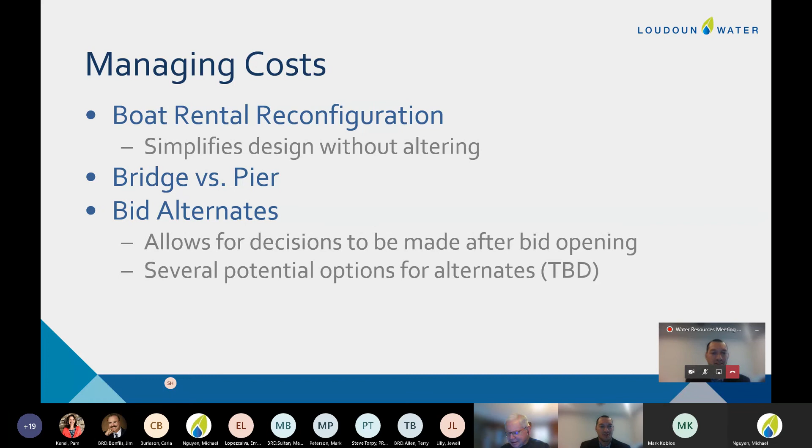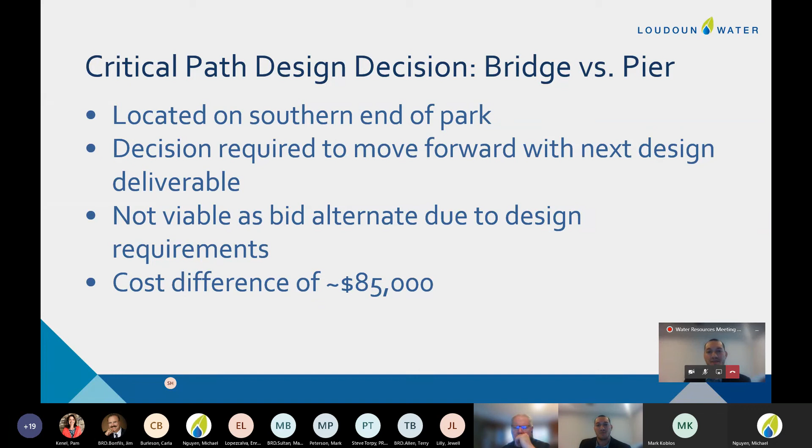So this is one of the critical path design decisions that we need to provide feedback to Nelson Byrd Woltz on. It's located on the southern end of the park, on the main arc. I have a map on the next slide to point out where it is. As mentioned, it's required to move forward with the design. This isn't viable as a bid alternate due to design requirements, so we'd have to make two different designs and have contractors bid on two different options. Lastly, a high level rough order of magnitude cost is about $85,000 difference between the two options.

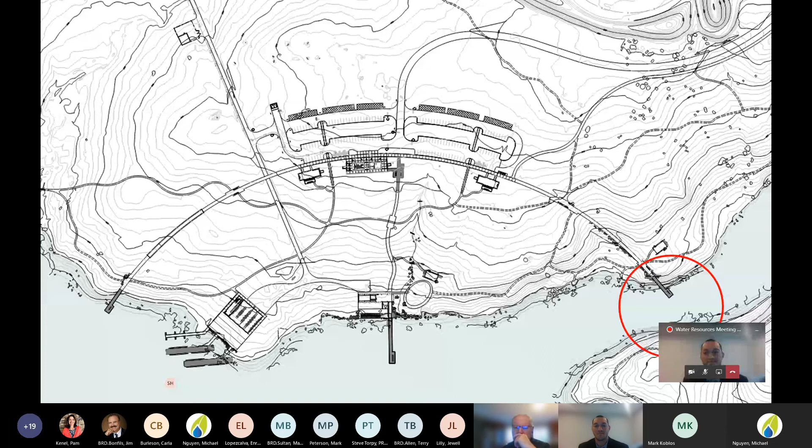So the bridge is more expensive than the pier. To give everyone a clear idea of where this is, it's at the bottom right of your screen, the big red circle, the southern end of that main arc we'll talk about later today. Right now this version is showing the pier option. On the next slide I have the bridge - it's about a 200-some foot bridge that will connect two ends of a little finger of Beaver Dam Reservoir. You can see on the map there's a trail that runs along the edge where it will connect, and we also have a trail system on top that runs around.

If we don't build this bridge, we're still able to access that far side of the finger. It's about 1,500 to 2,000 feet, from some preliminary measurements, so it's not inaccessible without the bridge, but it would make for much easier walking if there is a bridge.

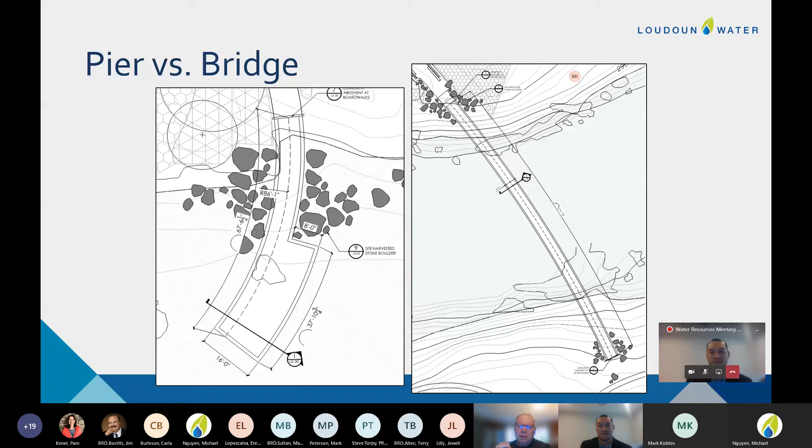Whereas with a bridge, you'll have the option to view pretty much down the full length of the reservoir, which is about 1.5 miles - it'd make for some great views throughout the length of the bridge. But again, it comes at a cost - we're looking at $80,000 to $90,000 or so to extend all the way to that far tip.

So I think the goal today is to get some feedback from the committee on what route you'd like us to pursue. If you have any questions or items to discuss, I think now would be a good time to talk about them.

And if I could just add to what you just said, I think we feel confident that bridge versus pier, the pier really doesn't take away from the educational aspect of what we want to do there. It really is about the views. So with that, I'll open it up to your questions.

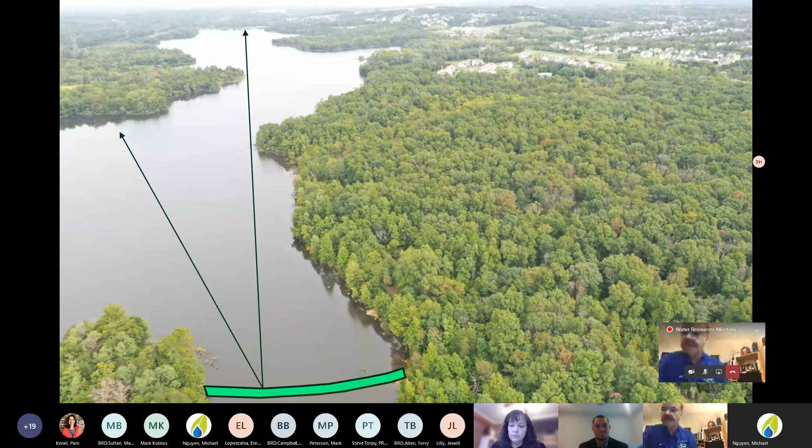I have to agree with the previous two board members. Having the bridge has a lot of value. It will be part of the trail system that is accessible, and having a sister who is wheelchair bound, I think it would be important to be able to get there as well as to get to the other pier.

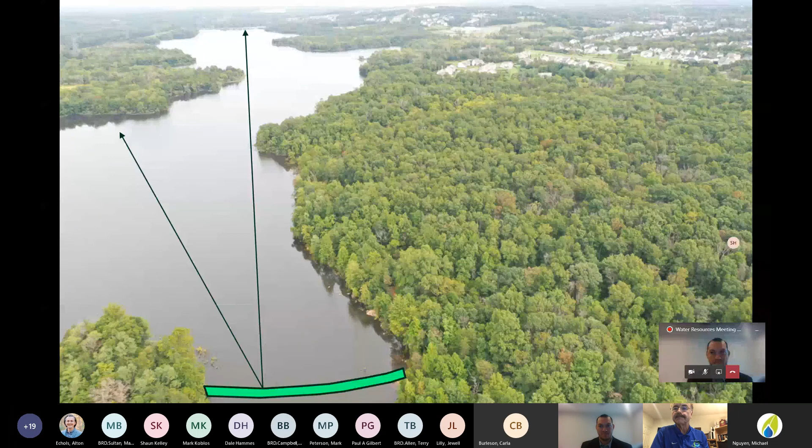Promise. Thank you, Marty. Oh, I meant to have my hand down, but I do support the bridge. Thank you, good, I think that clears all the questions. Oh, I'm sorry, okay, Marty lowered his hand. All right, so let's continue the presentation, if I can get the slides to go.

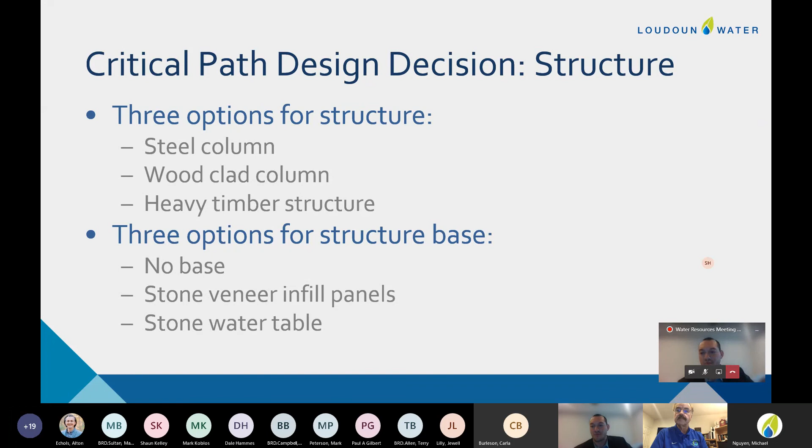So moving on, another item that we need feedback on is relating to the building structure. We have some rough images to show, but we're mainly looking at the supports of the butterfly roofs. Today I'll be presenting 3 options for that: a steel column, a wood clad column, and a heavy timber structure, and I'll go into the specifics for each of those. Once one of those options is selected, we also have some options for the structure base. I think the best thing is I'll just move forward through these, and we can discuss when I go through some of the options.

Please stay on, Mr. Allen. Oh, yes. You guys are gonna hate me, but in the renderings you sent, A, B, and C, I have a much more lengthy list of options, which includes D, E, and then at the end of E there's 1 through 7. Is there any reason why those other options were not included, other than just A, B, and C? Because personally, I like all the other options that weren't included better. And I know it's a subjective thing, but I'm just wondering why the whole list wasn't sent out.

Just to clarify, were those the renderings from when we were talking about the traditional elements? Are those the other renderings, Mr. Allen? No, D, E, and then the subsequent group after those are all butterfly roof renderings, but they were just different variations of what we were talking about along the way. In other words, the E versions have the lally columns wrapped in stone veneer, and the 1 through 7 versions have the columns wrapped in wood. Some of them go all the way up to the bottom of the butterfly roof, so you can't see any metal at all. They're all wood clad.

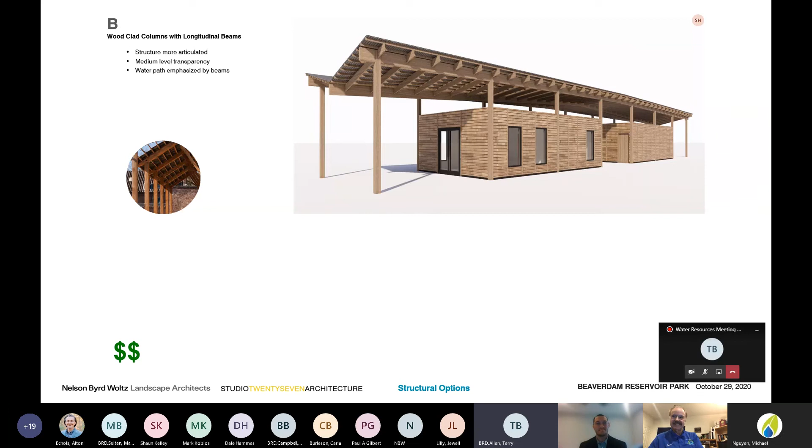I'm not a fan of the steel columns. They look like the ones I have in my basement. They just seem undersized, so I don't like that look. And I don't like the crisscross pattern, it looks too busy to me, so I vote for B as a straw poll.

I think Marty had his hand up also. If we're looking for votes, I'd have to agree with Terry, I would vote for B for similar reasons. Brent, I don't have a strong preference, so I'm happy with B, but if you have other comments I'd be happy to hear them. Yeah, I'm happy with B also. Great, okay.

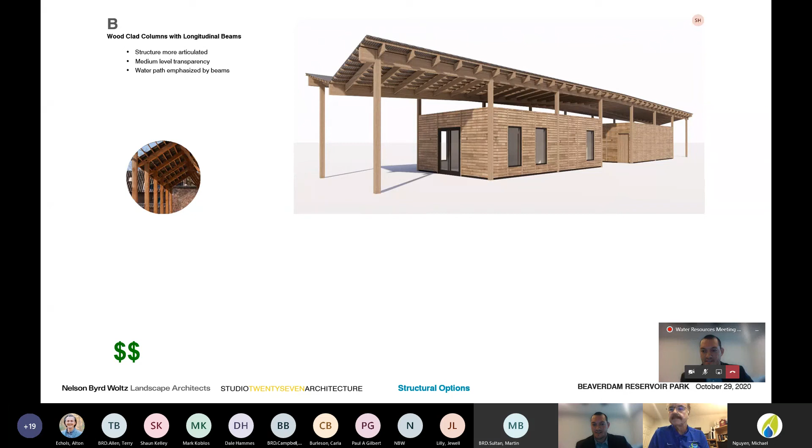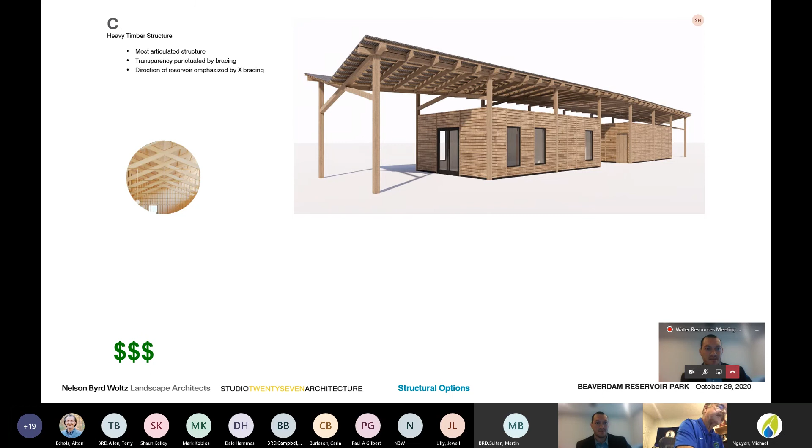Okay, so it sounds like, unless someone else has any comments, we can go ahead and move forward under the assumption that we're moving with the wood-clad columns. And with that, the next decision is to understand the footing for the base for these wood-clad columns.

Essentially, once again, we have three options: no base, a base with stone veneer infill panels, and then more of a stone water table base. And again, this decision is purely for the bases. We'll have some other decisions we can move forward with in a couple weeks for the committee. It might be a little tough to see here, but the three options are shown on the right.

If you have questions on them, we have Evan here to answer, and we also have Studio 27 on the call, who is the architect, to answer any questions as well. So you're looking for input from us on that? So I can go ahead and start.

I prefer the stone base, and was wondering if we could collect stones on the property and use those, but that's just me. Anyone else? This is Marty, I would agree with you, I like the stone base as shown. I agree, I'm sure we're picking the more expensive options each time, but I like the base too, the B.3.

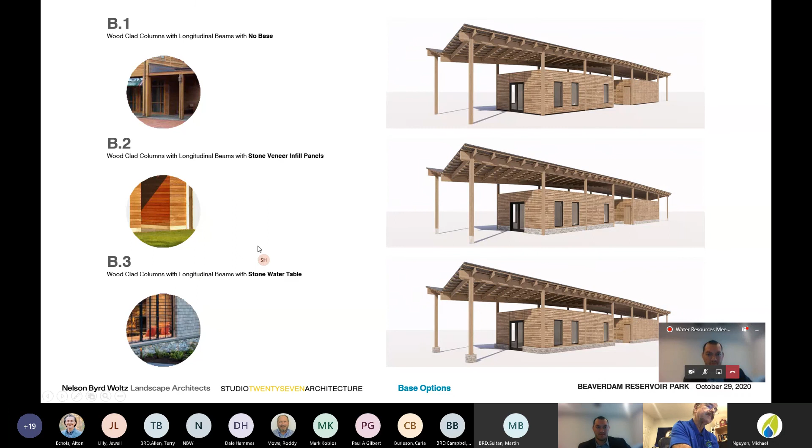The last thing I have to talk about today before I hand it over to Steve is just a quick overview of the trails within Reservoir Park, and then Steve will cover the trails from a broader aspect from a county perspective. The trails in the park are essentially three levels. I'll go over each in the following slides. The goal was to have different trails for different experiences, allowing access to some major structures while not impeding on the more natural scenery closer to the water.

Looking at the three levels of trails, first is the primary trail. These are the big main trails of the park, about 10-foot width, and they'll be ADA accessible. Flat, paved, or concrete asphalt pavers, depending on where in the park you are. This includes the bike-ped trail coming into the park, and especially the main arc, which is the big one. It allows people to span pretty much north to south throughout the park. So that's the big primary trail.

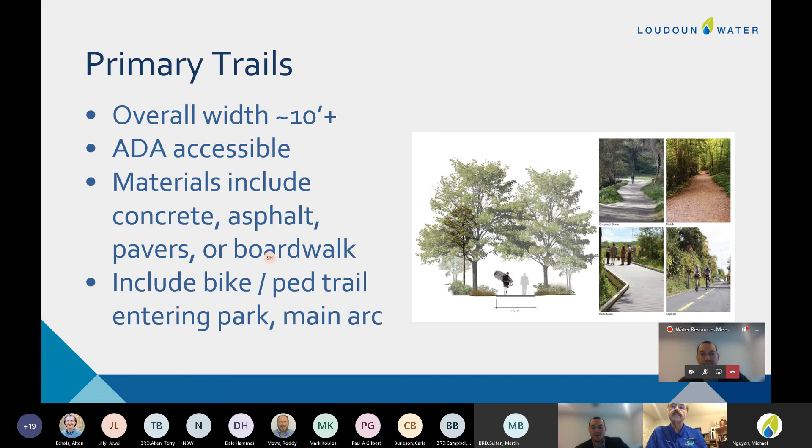Now off of that, we also have our secondary trails, which are a little smaller but still accessible for the most part to everyone. They're maybe 4 to 8 foot width in general. These will include materials like boardwalk, pavers, asphalt, and some mulch, but overall they're pretty accessible. These will be a lot of paths to structures, shelters, things of that nature—like the main path to the boat rental, trails near shelters, etc.

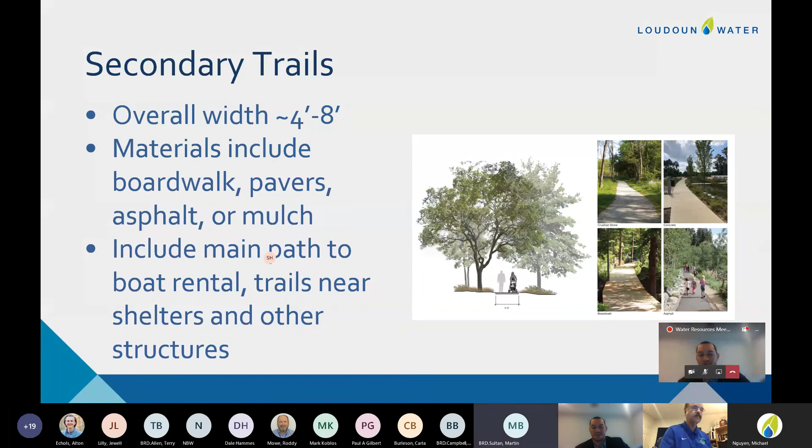Lastly we have the tertiary trails, and these are your natural trails. The goal is to get people away from the hustle and bustle and give them that experience a lot of people are looking for with this park—just being away from everything. They'll be 3 to 4 foot wide. If they're new, we'll look to mulch them; if existing, leave as natural surface. I think the goal is, if we need improvements, we can work with Nova Parks to do that. But as of now the plan is for existing trails to pretty much stay as is, and new trails will get about a 4 foot width mulch bed.

Just to give an overview of the trails in the park and how they lay out, I tried highlighting each of them. As you can see, red is the primary, with the main feature being that overarching main arc. Green is secondary, and then the large majority of trails are the natural surface or mulch trails weaving throughout the park. Were there any questions or discussions on trails and what we intended for each?

I'll just make a comment here, turning on my video. I think it's important, and I like what you've done here, Stefan, where we've identified and are designing different trails, different paths, different materials—I think that's important and I like that feature. Sometimes these discussions can be about picking between the merits of a natural surface trail and a hard surface trail, or different widths, and from my perspective there's value in all of it. Depending on who the user is and what experience they're looking to get out of the park, all of these types have value. I think it's good that we have a variety of different types of paths and trails there. So kudos on that, and kudos to our design team for doing that. I'd still like to see more, but we can discuss that later. I do like the fact that we have these varying degrees of paths and trails. So thank you.

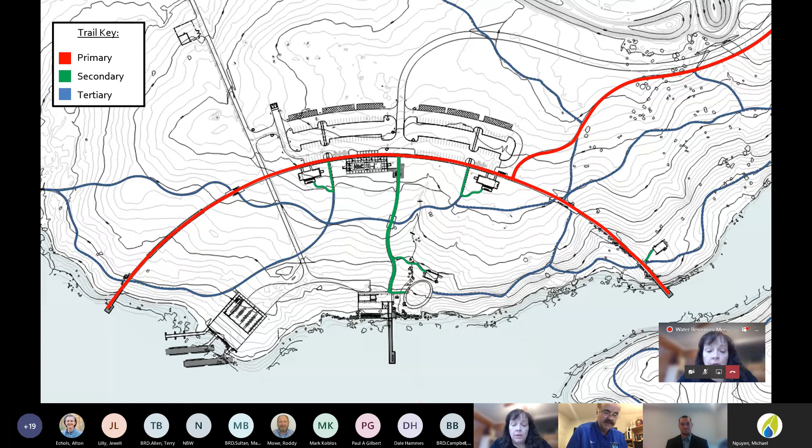Okay, and we can actually include something like that in the motion to the full board. I'm hearing acceptance of moving forward with a motion to the full board. I'm not sure in my head yet what that motion says, but we could certainly pass it through you, Mr. Bonfils, and of course our chair, to make sure it covers what it is that you want the full board to vote on.

That'd be great. I have a short brief of it that I've been working on with the numbers, and I'll review those with Dale, and let's put that together as part of the report from this meeting, and of course our visit to the park this last week. So I think that's pretty good. I think that's a good plan.

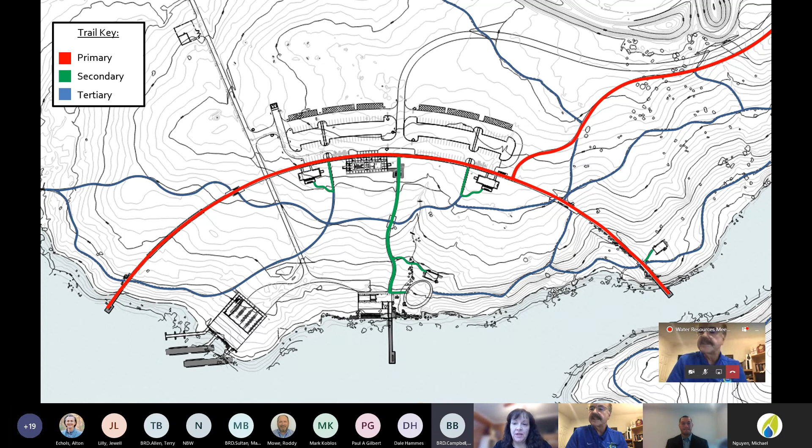Thank you. Hey, Jim, can I ask a question or make a statement here real quick? Sure. I've got...

The cost estimates here, and as I've been looking at it, the vast majority of cost associated with this is attributable to the structures. Just to put that in context, the natural surface trail that we discussed earlier, 3 inches of mulch on existing grade, that's $12,000 some there. So from my perspective, the trails and the pads and all of those sort of biking and pedestrian facilities, in my mind, I think that's priority.

From my perspective, I think that's what the public is most interested in when they come to this park. So from a cost standpoint, I'm not willing to cut on that side. Just speaking for myself, I'm not willing to cut paths, trails, bridges and things of that nature. I'd like to, if anything, expand that. And if we're pushed to save money, I'd rather look towards the structures. But I also recognize the rest of the board might not feel that way, and that's okay.

Speaking for myself, if we are pushed to the question of the structures plus more money for various treatments of those structures, versus the paths and trails, I'd rather have both than to cut on the trails. I'm not willing to cut on the trails, but if the board wants to look at cutting from the structures, I'm okay with that.

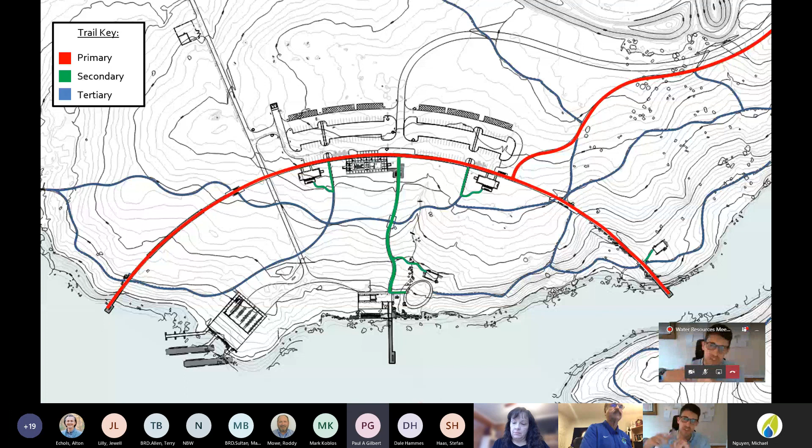The only other caveat I'd add, I don't know if Paul's on here, but I also recognize Nova Parks may have a different understanding of the impact the structures have on Nova Parks' ability to charge fees and bring in revenue from this. Maybe you could touch on that, Paul, because I understand that might be a different aspect of this.

Thank you. I think Jim has already alluded to it, that there aren't a lot of money-making opportunities here to recover the operating costs. Some of the few ones are the shelters, the boathouse will be something, and the boat rentals. There's an extraordinarily high likelihood that the operations will be a net loss, but you're trying to keep that net loss to a manageable level.

I don't know that we've put a fine, sharp pencil to exactly what it will be, just because we're kind of waiting for these decisions about the structures to happen. The maintenance building is also important. We want this park to be maintained well, and we need kind of a back area to work on things. I don't know if that answers your question, but all these buildings do impact the finances of it. There might be ways to cut down the cost of the buildings, but their function is important.

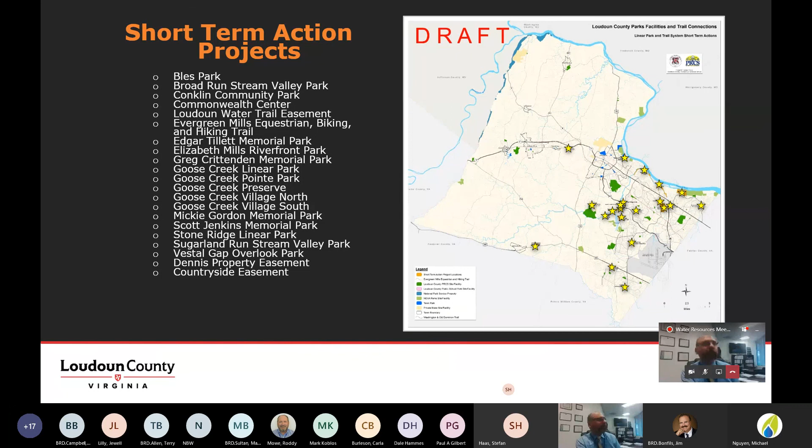That plan also directly links us to the Kincora property coming to us, about 150 acres, and the Commonwealth Center, which you see on the fourth bullet there, providing another large piece of property right in the heart of Ashburn, which will all be used as passive recreation and trails. Next slide, please.

So as I mentioned, the Broad Run Stream Valley Linear Park—and there you go—Goose Creek Stream Valley Linear Park, the W&OD Trail essentially, and the Potomac Heritage. You'll see those on the map in front of you. One of the things that's part of the Linear Parks and Trails initiative the consultant is working on is the implementation of what we're calling the Signature Project.

The Signature Project, if you were to start at the confluence of the Broad Run and the Potomac River, essentially there at Bles Park, come all the way down, go south along the Broad Run, hit the W&OD Trail—which I can tell you we are so fortunate in this county to have as part of our trail system, provided for everybody, because it's unlike anything else and really helps with the connectivity of these communities.

This Signature Project that we'll be working on right out of the gate makes available that loop that goes down the Broad Run, back west on the W&OD, north along the Goose Creek, and then ties into the Potomac Heritage National Scenic Trail. So you have that kind of rectangle right in the heart of the county, very close to the population base, getting that open as another one of those projects that will show movement with this overall initiative.

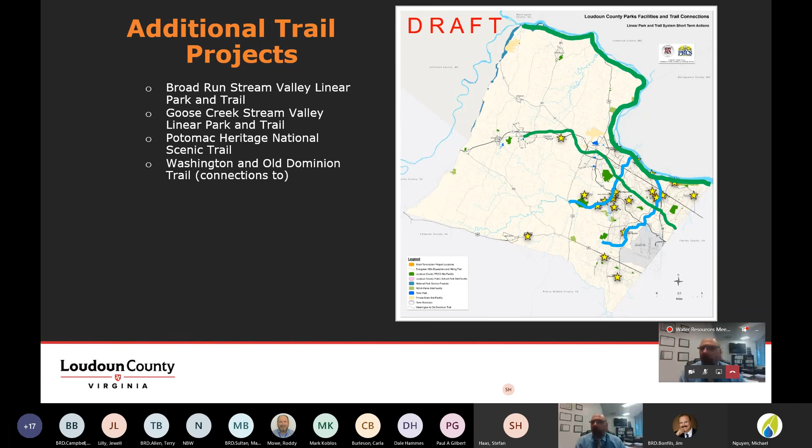The initiative is really trying to connect the community. We're talking about this from an economic standpoint, connecting the towns, but really being able to provide an opportunity for folks to get around the county in multiple ways—whether it be biking, equestrian, or hiking—really having that connection. It's something that is going to take an enormous amount of partnerships.

We have been talking with the various folks in the towns. Obviously, Nova Parks is a great partner and has been at the table with some of these discussions with us. The other major player is the Homeowners Association, because in Loudoun County, the homeowners have control of an enormous amount of their own trail system. We're not trying to reinvent the wheel in those communities, but we do want to have that connection with the Homeowners Association.

So what's been going on or done to date? Well, I mentioned earlier we created that Linear Parks and Trails Subcommittee. They created the scope of work and put that out after going to the Board of Supervisors for an RFP, which we've already gone through, and we have hired Design Workshop out of Raleigh, North Carolina, with a lot of background in developing these overall plans.

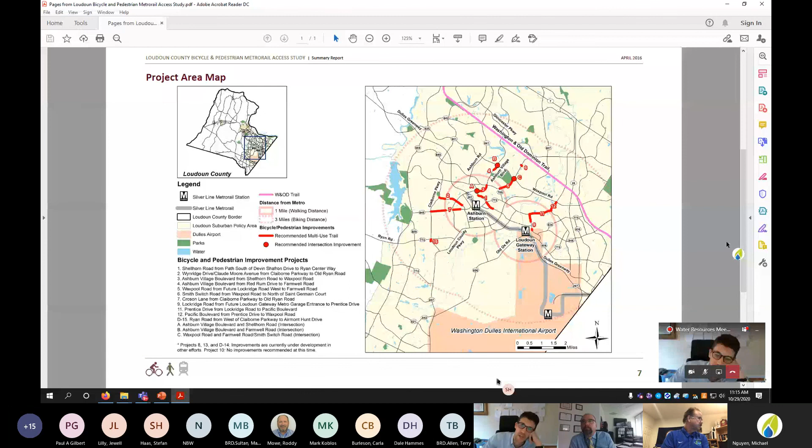So I think that's something that needs to be in our minds as we're planning this out. When I was looking at the design drawings, we've got 9 bike loops to park your bikes on, and you could try to double those up and get 18. But I've got pictures I could show you all where it doesn't work well to even double them up. But even if you did, to have 18 spots for bikes, I think is just poor.

I think we can do a lot better than that. Again, this is not a big cost, right? So this is not something that should be driven financially, it's really just having good design. And there's substantial improvements planned that the county has in the works, bike and ped improvements to Croson Lane, which is a direct shot right there to the ball fields, which are behind this park we're working on. Let me pull some up real quick.

So Loudoun has a bike and pedestrian mobility master plan. I'm not sure how many people are familiar with it, but a lot of work went into this, it's over 100 pages. Some of the highlights here, just on the summary: increased levels of bicycling and walking will help improve air and water quality in Loudoun County, and I think that dovetails with our mission at Loudoun Water well. It says further that the plan recognizes the intrinsic value of bicycling and walking, and that Loudoun's goal is to advance bicycle and pedestrian mobility as a transportation goal. This master plan was the product, it says, of extensive analysis conducted by the Citizens Advisory Committee, county staff, consultants, and so on. This was years in the making to put together.

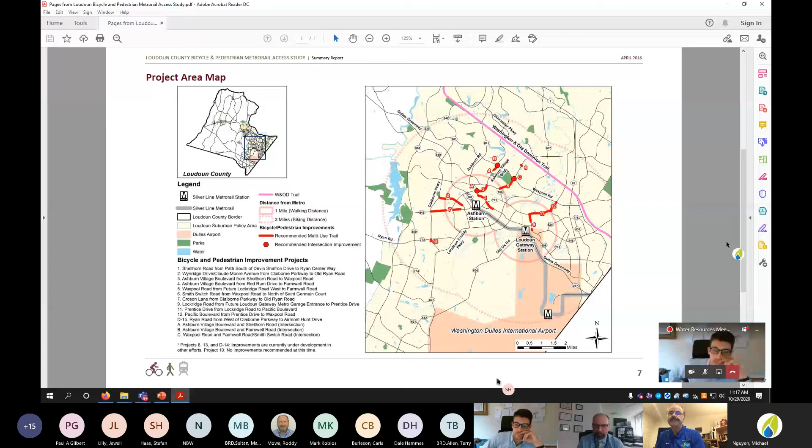Steve, you had mentioned that this trail study and plan you're doing is all for natural surface recreational trails. Part of what Brent mentioned is the bike ped system, and that a lot of that has to do with VDOT and others. I know the county has set aside some money to put in some paths and sidewalks to do some interconnects, and those can also help the recreational trails. Is the study you're doing also going to help identify many of those missing links?

It won't be focused, Jim, on the missing links associated with anything transportation related with the bike ped plan. This is more recreational and natural surface trails. But it is going to look at how those two work together, because we recognize that often you won't have a natural surface trail connecting one community to another, but there may be an existing multi-use trail or sidewalk system already in place. So you'd still have the ability to hike or bike from one to another, then on to a recreational trail. They're looking at how all of this fits together, but they won't be making recommendations on bike ped.